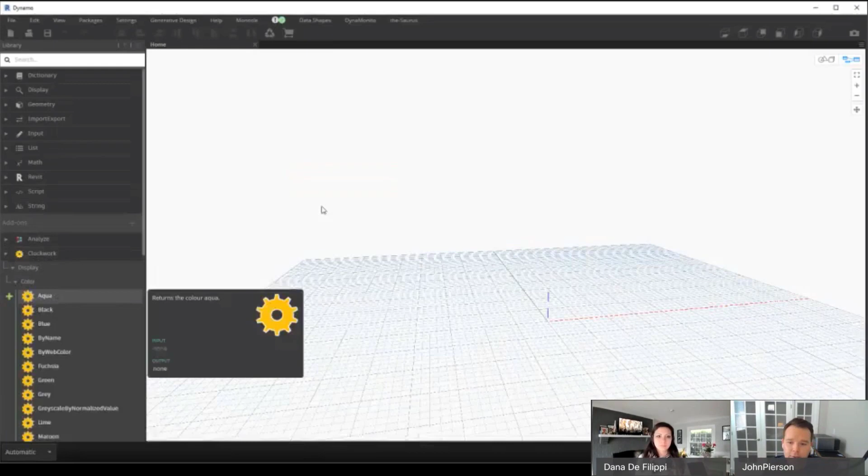My specific use case was, since I am a package creator and someone who works for a consultant, we send off Dynamo graphs with packages in it a lot. And until recently, there was no way of knowing - if I drop a clockwork node on the canvas and sent this to someone and it turned red or yellow - what package this came from. So that's how it started, was frustration with Dynamo. I have a lot of respect for the Dynamo team, all those people are awesome, they're friends of mine, we've hung out too, like we were talking about earlier. But there are things that kind of miss the mark.

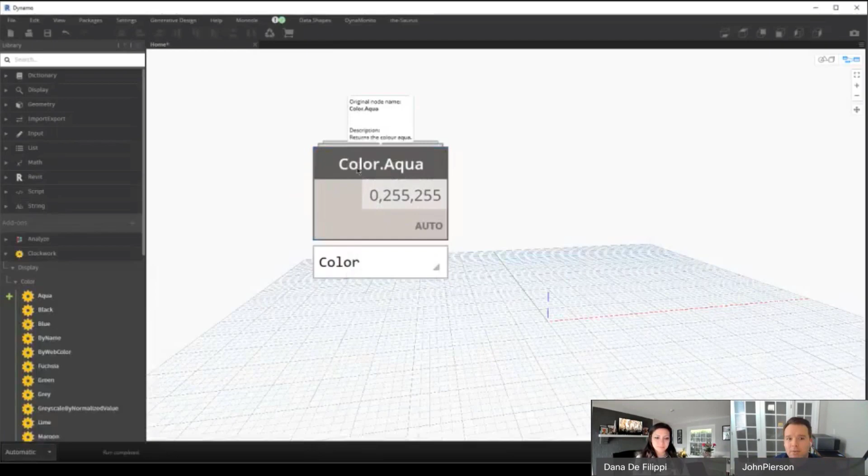So it started out with me trying to fix some of the stuff that was frustrating me. Whenever I started looking at custom package usage, we were working on things like how do we tell which package it's from, and we were playing around with just annotating the graphs. So I reached out to Racel on the Dynamo team and said, hey, how do we start making stuff that makes Dynamo read Dynamo, you know?

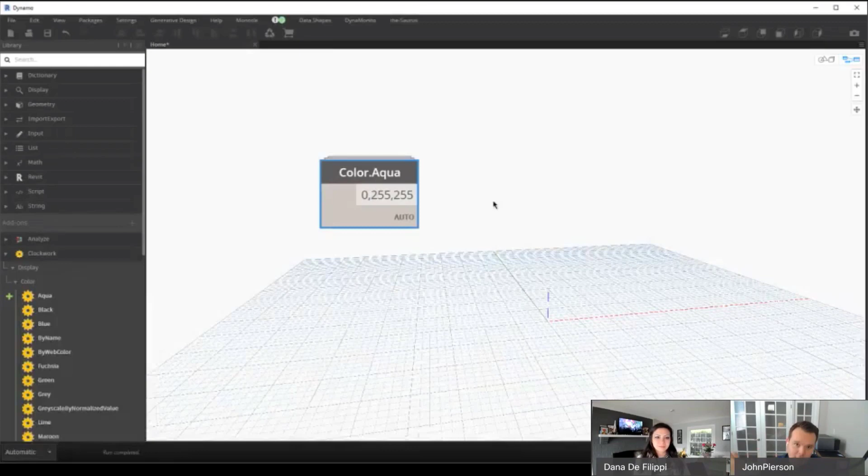And she said, oh, you should start looking at view extensions in Dynamo - they're really cool and this new thing. We're teaching a class in London on them at their user group. If you don't know, the Dynamo user group in London is a huge group, and they're all geniuses. So they did a whole workshop on view extensions there, and they recorded it, so I was able to tune in and see what the deal was. With that, it was one of these very complex things where we went from adding stuff to the sidebar of Dynamo, to adding stuff up in the ribbon.

So in regards to my own journey, that was a big step. I started out doing Python nodes, similar to what you're teaching on your channel, Dana, to building C sharp nodes, and then it had to jump to something that was like an add-on to Dynamo now. So it was a pretty crazy jump for me that was a little scary, if I'm being honest.

And why did you jump? Like why go from Python to C sharp? Yeah, so from Python to C sharp, one of my goals was to start building Revit add-ins as well, and C sharp just always seemed kind of interesting to me. So I started learning that, and Marcelo actually showed me some of the zero touch stuff as well.

I really like C Sharp because I'm lazy. Visual Studio does a lot of auto prediction for you, so it's pretty amazing when you're in there. You can get some of that in Python too if you set up your environment correctly, but you're typing and it's just predicting it. It's so nice, and then you compile it.

And nowadays I build Revit add-ins as well that we sell, and they're in C Sharp, compiled to plugins for Revit. So it's kind of part of the journey. I still like coding in Python all the time in Dynamo though, because it's so quick - you just drop a node and start hacking away at it and see what happens. But yeah, those kind of went from the Iron Python implementation in Dynamo to C Sharp with zero touch nodes within Dynamo, and then one of these frustrations led me to view extensions, which are in C Sharp as well.

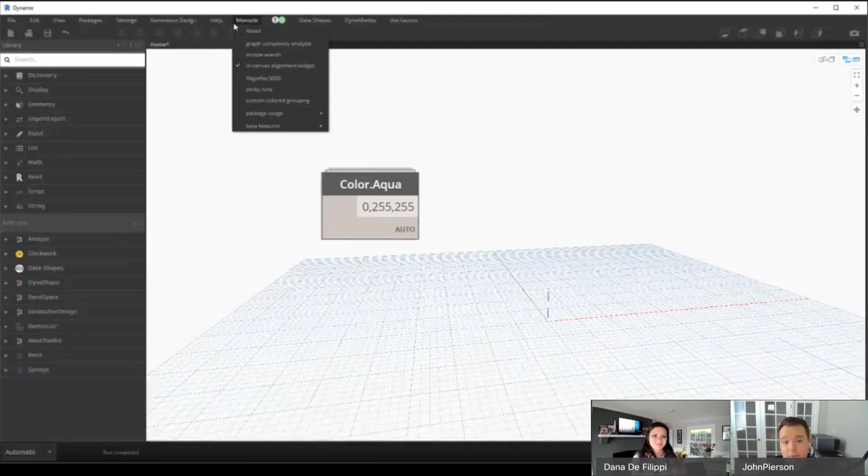So kind of interesting - view extensions are considered a little of a crazier thing to create. Back when I was working on the package stuff, it was very clear how difficult they were to make. So when I started working with it, I right away started screwing around with how things work.

So I met with the Dynamo team about package management, telling them some of my gripes - kind of like a little gripe session. I was like, we need to tell people where packages come from, what packages these nodes come from. And they were like, well, it's very hard to build, it'll never exist in Dynamo, or something along those lines.

So when I built it, I just went ahead and was really goofy with it, because what it's doing is really cool, but what it looks like is very silly and kind of dumb. It's kind of like my nod to them regarding how they said you couldn't manage your packages in that way. And I will say, I call it the package usage doggy.

Is it the doge? Carl Storms told me 'doge' once, and that stuck. So that's what I've always thought. Carl and I had a debate a few times on this, I think on one of our many chats. And yeah, I believe both of us say it differently. And Bill, of course, wanted to throw in a third, like the GIF debate. That kind of adds to the fun of the tool, right?

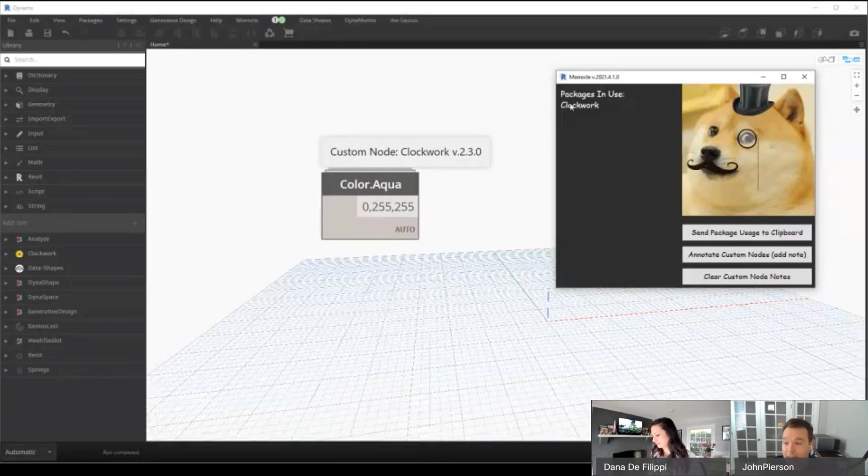Yeah, and when I was building it, I right away started screwing around with adding this little meme in it, Comic Sans and all that stuff. And at the end of the day, it was a really cool tool that does some crazy stuff, right? It does all these annotations for us, and if you move the node around it'll update, and it'll do it for a whole graph as well. So it was one of the first things I built just to make sending Dynamo graphs better, and it's just kind of funny that it is this kind of tool.

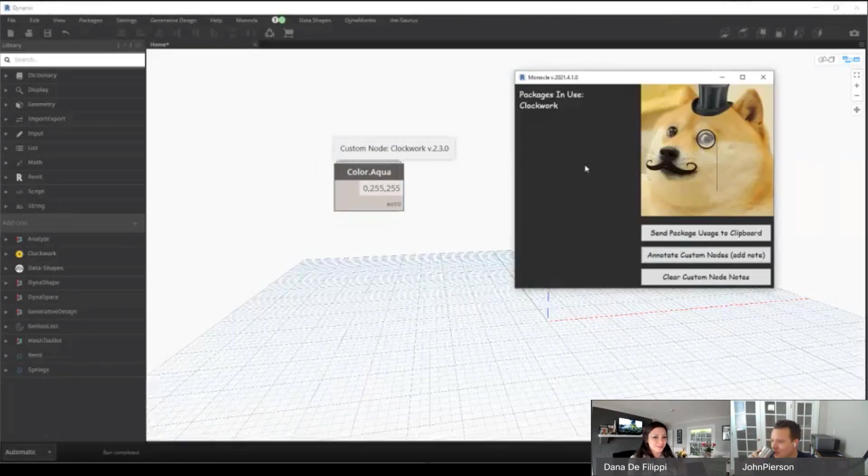And then even something else I added along the way of building this tool was that depending on the month it is, this guy will change what he is too. So keep an eye out for that too. That's a new looking doge there. For sure, and I think even if I do it again, it should probably be different.

Oh, that's so cool. Yeah, so if you do it around certain months, I won't say which ones, it'll actually be different too. So keep an eye out, just kind of fun with it. This is open source too, this specific portion of this tool. So yeah, it's kind of contributing back to anyone who wants to build cool tools, like I always say, right?

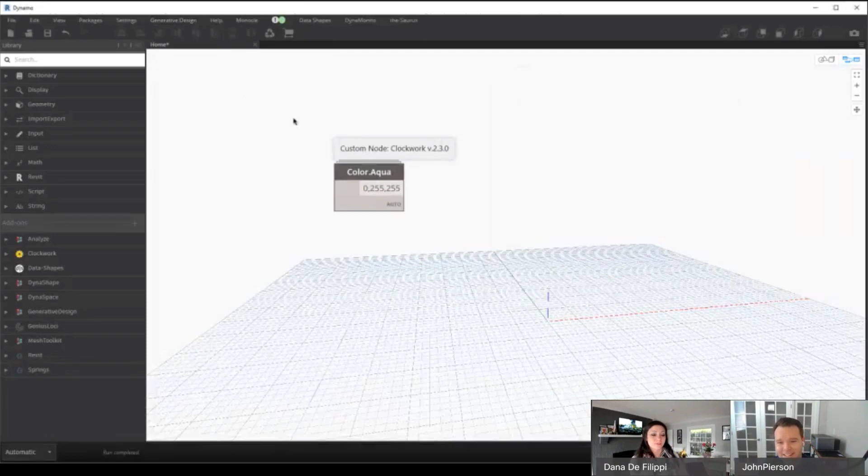It's definitely a tool I use very regularly, for sure, with every script that I have. And if you're not telling people what packages you're using in your Dynamo graph, you're not being very nice - not just to help other people out, but to yourself too.

Like, what if you get a new version of Dynamo and you want to open that graph in the new version? You have no idea. We've seen that a lot, where people install a fresh Revit install and it comes with Dynamo now, and all these add-ons are blank.

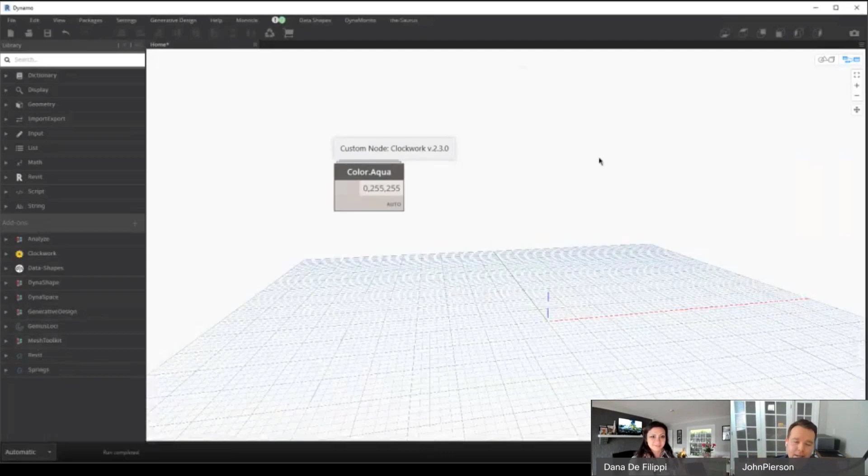They're like, man, I don't know where any of these came from. It's nice to annotate them in a way that stays with the file - this stays with the file forever until you delete it. So it's like these are notes in Dynamo. If you hit Control W, you can add a note, of course.

There's other advanced ways, like auto-downloading packages from the package manager and all this madness. At the end of the day, I just wanted the equivalent of a sticky note on the screen telling you, hey, this is where this came from. So that's kind of where that happened, and the whole Doge meme thing - it's fun. A lot of people laugh at it.

I think at AU 2019 in the Dynamo classes, I loved seeing this on every screen in the class for Carl's presentation, I think, and Jason Boehning's. It was kind of funny - you're at this professional conference and we see this guy on all the screens. It's kind of like, I made it. No, I'm just kidding. But yeah, it's really fun.

And for every person that has fun with it, there are people who have less fun. So we do have the boring mode too, a little more professional, so you don't have this dog on your screen when your boss walks by, back at the office, you know.

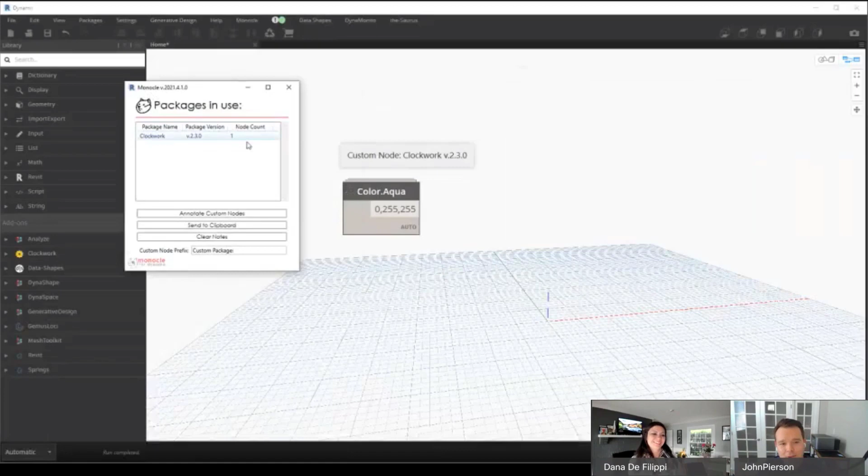This one has more features as well, like node counts - if you start adding nodes, it'll actually update those counts too. It also has a keyboard shortcut. Having stuff that's really interactive for users, I want the user experience to be great. If you hit Control Shift P, it'll actually do it too.

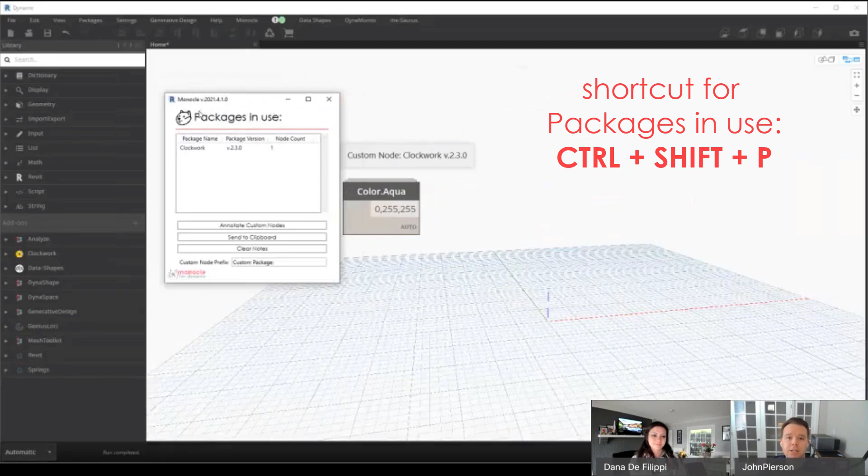A lot of the tools I add to Monocle are partially because people have these ideas, but it's also just experimentation for other tools I'm building. Keyboard shortcuts are something people are super familiar with in our industry, so adding them to tools is pretty fun too. But yeah, this one's the boring mode if you really didn't want to see the big picture of the Doge.

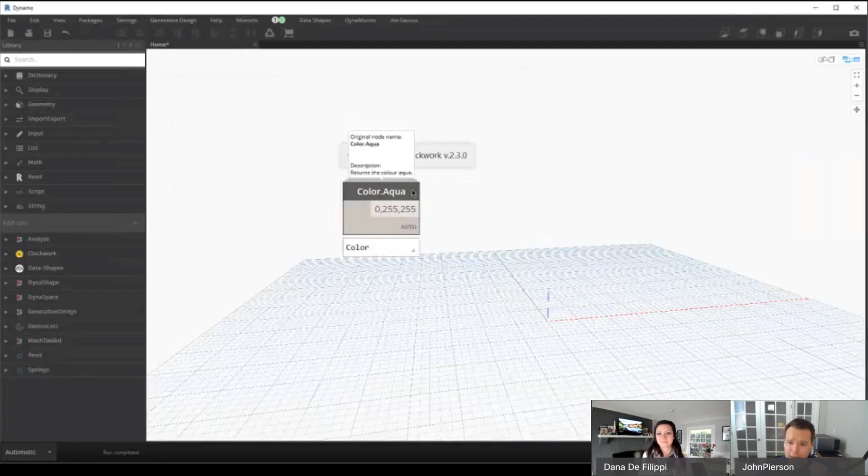Other than that, that's kind of where it started - that was back like three, four years ago when I added that, and then it just kind of took off from there. Monocle has a bunch of menu items in here.

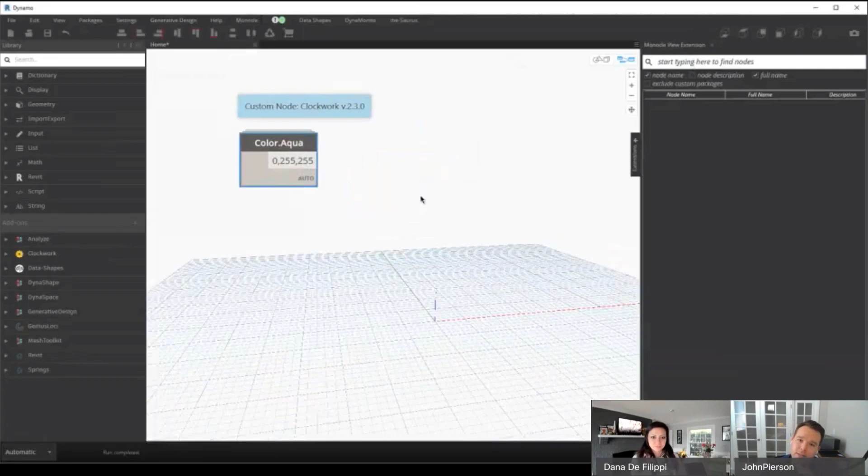One of the ones we were talking about before we started recording was the search, or we did it right at the beginning - the Dynamo search. I've spent a lot of time deconstructing it just because I'm so frustrated with it. I know that if you start typing, it's loading all these icons for you, and it's also only loading like 50 results no matter what letter you type, so they can try to make it faster.

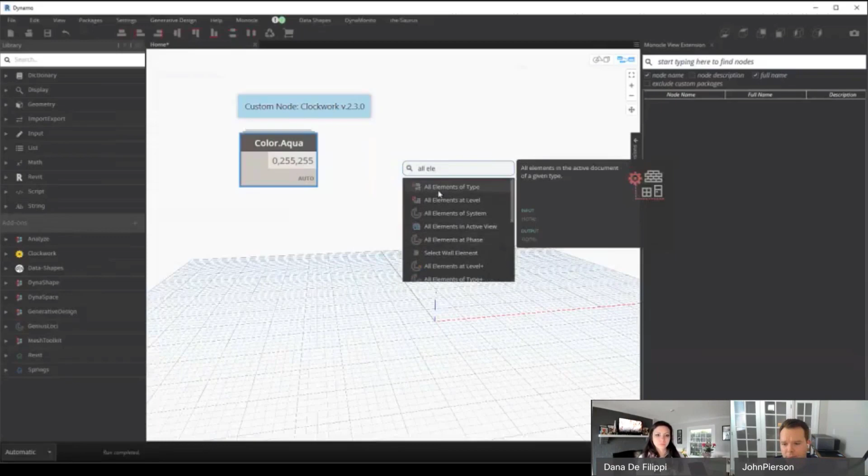And I know all this because it's open source. I've had people go, 'how do you know that?' You can look at the Dynamo source code. They're also searching everything about a node - so if we just place a node, when Dynamo searches, it's searching the node name, the node description, the node category, and I think all the inputs and outputs at the same time.

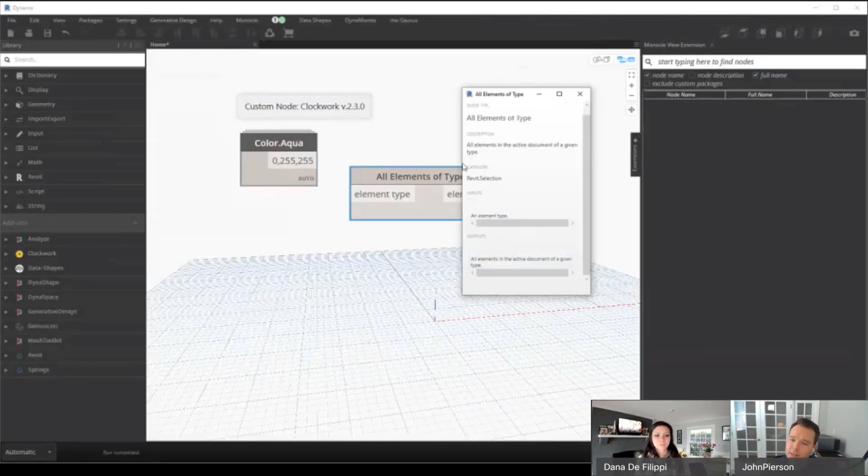So the reason you get so many weird results is because they're eating the whole pizza at once - they're not picking how many slices they want first. So when I saw that in the repo for Dynamo, I was like, oh, we need to give users a choice there of what they're searching. Because we just search everything, we're going to get results that just kind of tick people off.

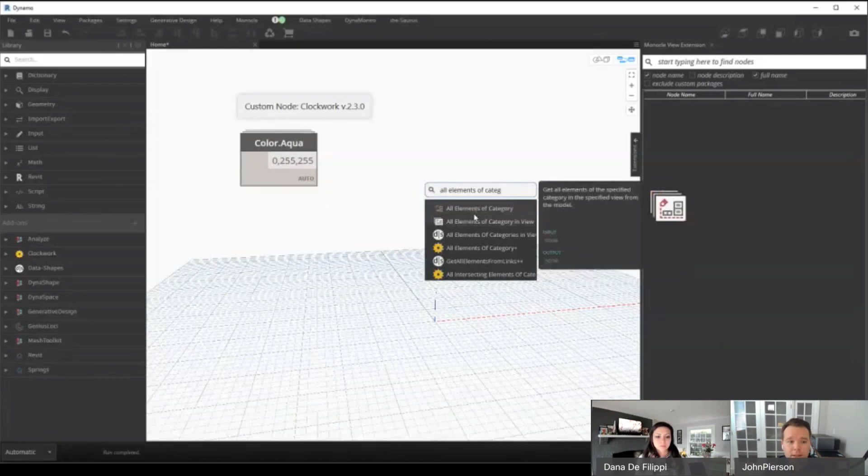I may be someone who's been using Dynamo for a few years, but I definitely empathize with our users who are new, who you tell them search for this node, and they start searching, and they right away think they did something wrong because they can't find it. That's a really crappy place to be whenever you're trying to learn something, to feel bad that someone else next to you got it and you didn't. So I like to have fun with these tools, but at the same time, I like to try to relate it back to where I started with these tools.

It also makes it super hard to teach, right? Something that should be a non-issue, you shouldn't have to teach somebody how to search a library. You now have to take 3 steps to search, right? Exactly.

And if you're in a lab setting and someone has a different version of Dynamo, the search might work differently. We're all used to searching. Our whole life is searching for data these days, and we're all pretty good at searching. And then you get in something like this, and it's just showing you results that are not great. So that's kind of where this came from for sure.

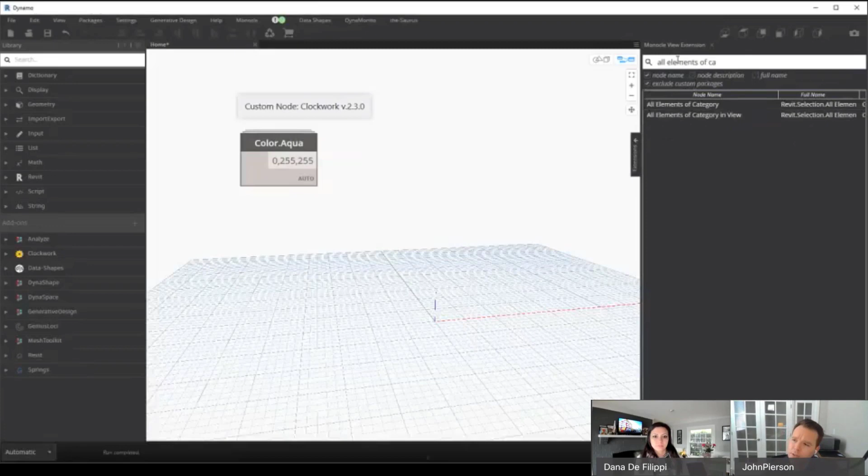And then we have the option in here to search by the node name, the full name of the node, which includes the package name a lot of the time. We can exclude custom packages, or we can include the description if we really want. So this is kind of how our search works. In newer versions of Dynamo, you can undock this. I'm in Revit 21, so you can't. But once you click on it, that same interaction happens where it'll place a node for you. I think if you hit enter, it will too.

Is there a way to get, I guess not, because it's a separate extension, but to get the information at least in terms of where that lives in the library? Yeah, so that is not in our tool, like this little tree view. That one's not in this tool specifically. Which maybe isn't even necessary.

The whole reason I teach that is because things are impossible to find. And so being able to find where groupings live together, you end up learning 30 new nodes because you would have never been able to search for it, just going to the library. But maybe this way you don't even need to be in the tree because things just come up when you search for them.

Yeah, it's interesting. I like the tree view and breaking it down because it gives you logic. So like Revit, selection, here's how to collect things. In this tool, I want it to be really fast. So that's why it doesn't have icons. It doesn't have anything that makes it look any different because we're just wanting to search like this. That being said, we probably could add some of that or implement our search stuff into the default. Or have an option for the column, maybe, to just tell you the root of where that thing lives in the library. Yeah, very true.

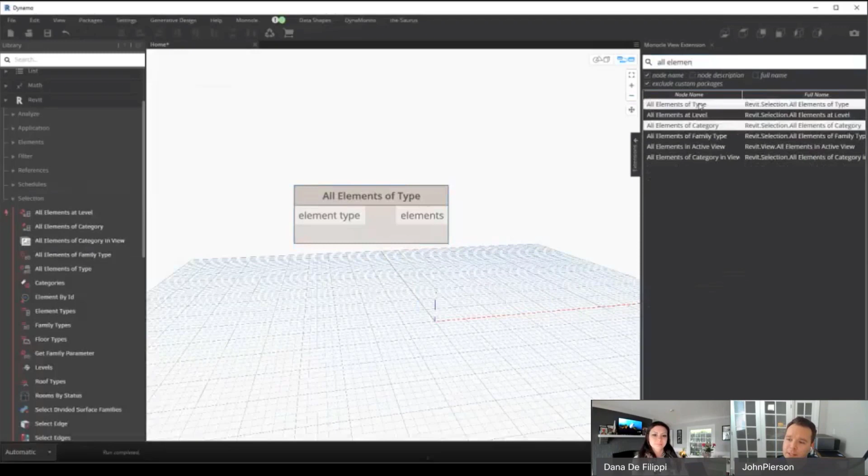Other great things. I built this a little while back, just being frustrated with search, and one of the users of the tool said, I'm frustrated, I have to click in it. So that added, you can do Control F to go to the search as well. When you do that, it'll place the node. You can do whatever you want. And I hit enter, so I did the first one. But Control F will go into that find mode and clear the selection for you. So if you have a big selection or a big text, it'll clear it too.

Yeah, so that's kind of where that came from too. This is one of the ones we see used the most, I think. So much that even in the Monocle menu, you can go to a beta feature and just replace the default search with ours. So that's kind of in there too.

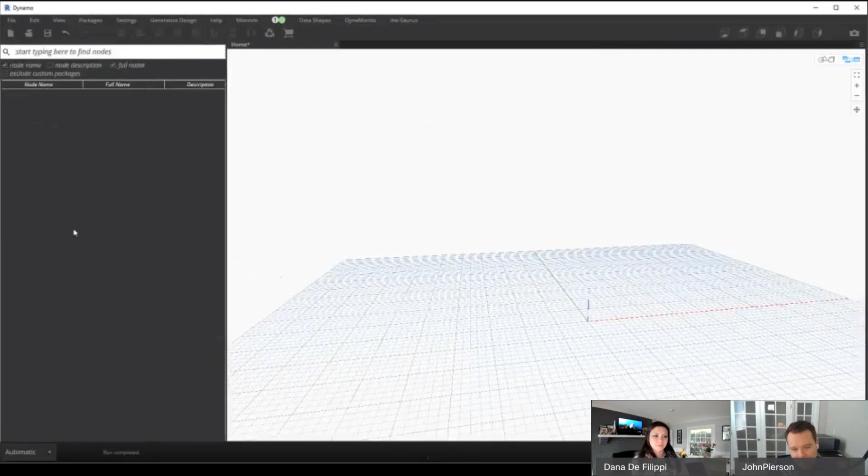Wow, that's very cool. I don't use this one as much because I do like to see the menu with the tree, the collapsible tree. So admittedly, I don't use it this way a whole lot, but I know a lot of people do. So it's kind of one of those funny ones.

And that probably could be written into the XML if you wanted all users to see it that way, right? Yeah, I think you could. So you could probably have all your new Dynamo users, when they go in there, not fumbling through this search or having to pull up the Monocle search. It automatically defaults to the Monocle search. So that's a decent idea, actually.

For sure. The other scary part with building tools, and people will know this as they start to build graphs, is the more stuff you build, the more you're like, man, I hope it keeps working. You know what I mean? 100%. Especially when a new version of Dynamo drops and you're like, oh God, it's gonna break. Exactly. Or a new Revit version. Yep. Or a new category of elements.

Oh gosh, yes. That's something we deal with a lot because I'm a BIM consultant, where we'll send graphs and they'll stop working between versions, and it's like, oh my gosh. Categories is a great one. So we'll use a default search for this. Categories is great because we love this node, right? You've shown this node on your videos as well, because collecting elements... well, I am guilty of using the right click search a lot, so there is that.

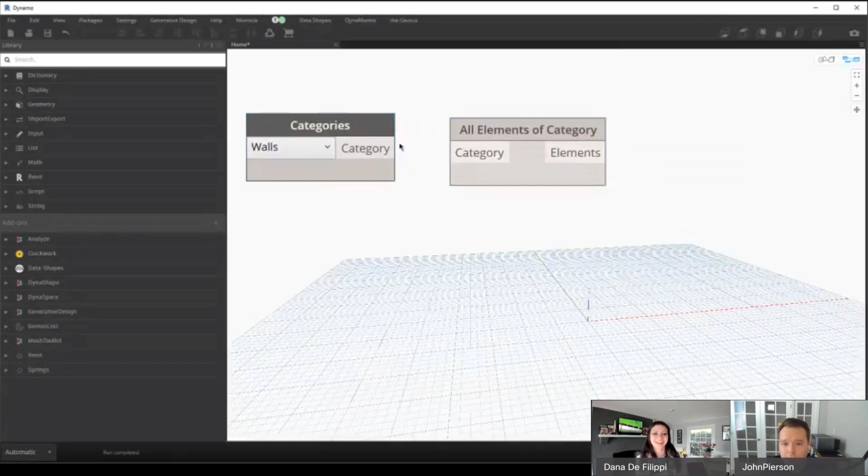I do too. And I think once you get to know those things, they just become muscle memory, right? Like Element.GetParameter, I know to type that. Yeah, once you start to learn it, it's like second nature. So that's another thing to keep in mind when you're training people, too: it's easy for you to say element get parameter value by name, and it's like, no, it's Element dot Get, and no spaces in that one. And Element, not Elements. Yeah, exactly. So it's one of those things you get so used to.

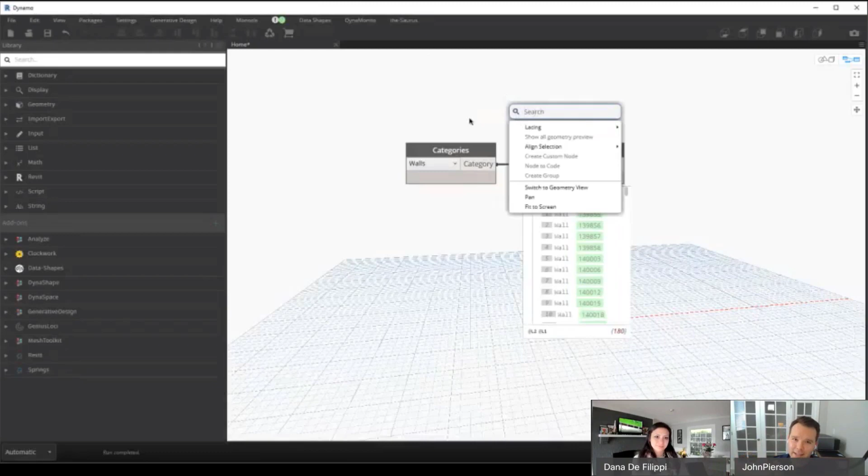Yep. And even for the right click search, there was a little bit where Monocle would override that one too, but we got to a point where they were clashing, where you'd start typing in the Monocle search and then the out of the box search would pop forward. It got crazy. So I was like, okay, we can't mess with the right click search. That's theirs. Or shift double click, I think still does it, or is it no?

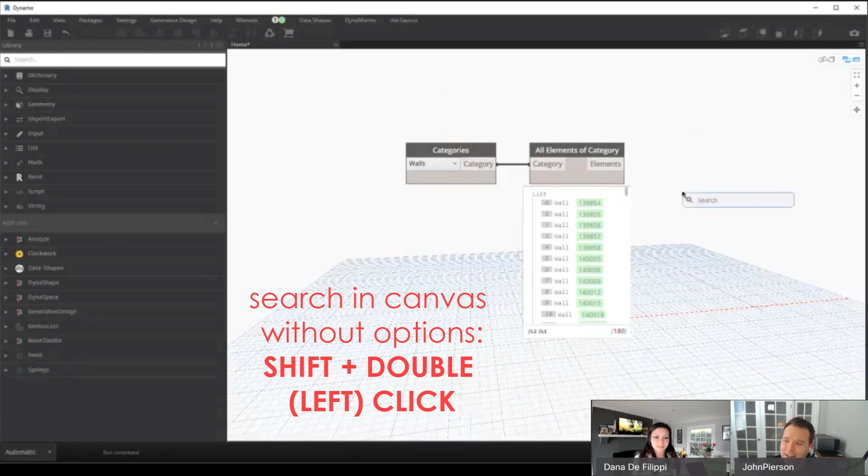Yeah, shift double click still does search too, without the new little search menu. Oh, that's a search for me. Yeah, if you don't want to see all this, you can shift double click. Oh, interesting. Okay, even that one's acting a little odd. Yeah, so that one's another type of search as well.

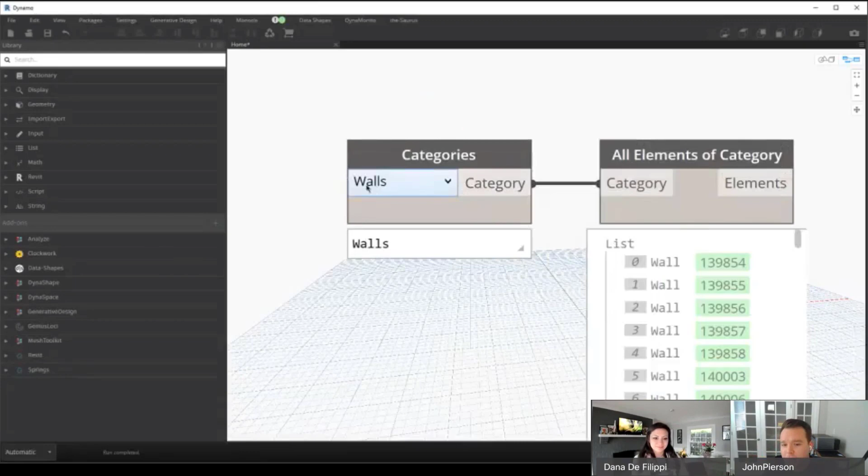But thinking on that, the categories node is one we use all the time, but between Revit versions or Revit files, depending on how many categories are in the model, up until I think recent Dynamo, this can change. So if I have wall selected in Revit 19 and then I load this in Revit 21 and I had two more categories above it, I'd probably be on common edges, whatever the heck, you know.

That's another one where all along we were like, okay, we're going to stop doing that and we're going to do, if I could type, Category.ByName, do walls. Gotta do it inside of quotes. So as someone shipping off a graph to someone, this is the best way to do that.

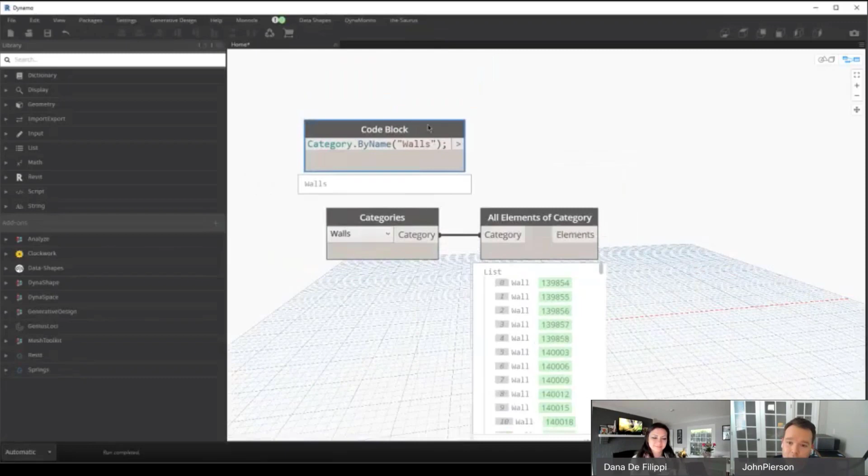But that led to another frustration with Dynamo for us at Parallax specifically. I don't like typing this all the time. And other nodes have that node to code option whenever you right click. But you'll notice none of these do. So that was one thing where it's like, man, node to code's great, but we can't do that with this.

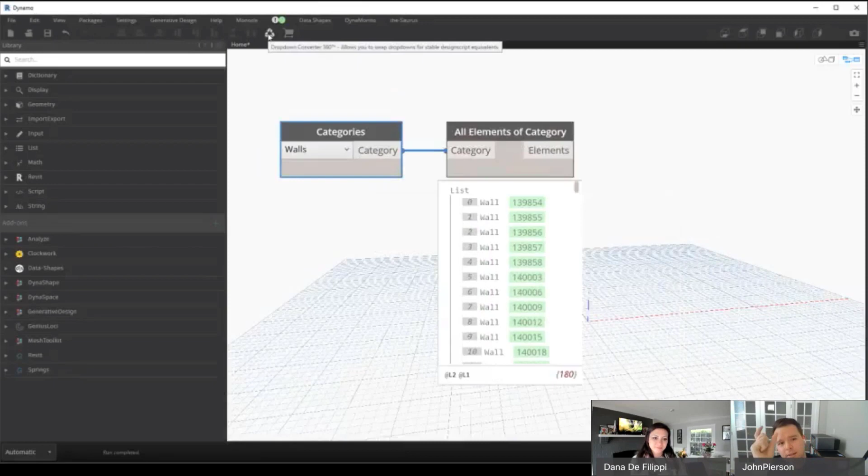So in Monocle, we actually kind of have our own little way of doing that as well. Inside of the toolbar, we've added shortcut icons for some of these quick things that just make life easier. So instead of me wasting my time typing all this, we can now convert those. That's amazing.

Even when you get it from somebody else, when I'm cleaning up a script and doing the custom package and all of these things, that would be an amazing thing to do. Yeah, add it to your cleanup checklist. Yeah, we could start to have it where you have these cleanup things for sure.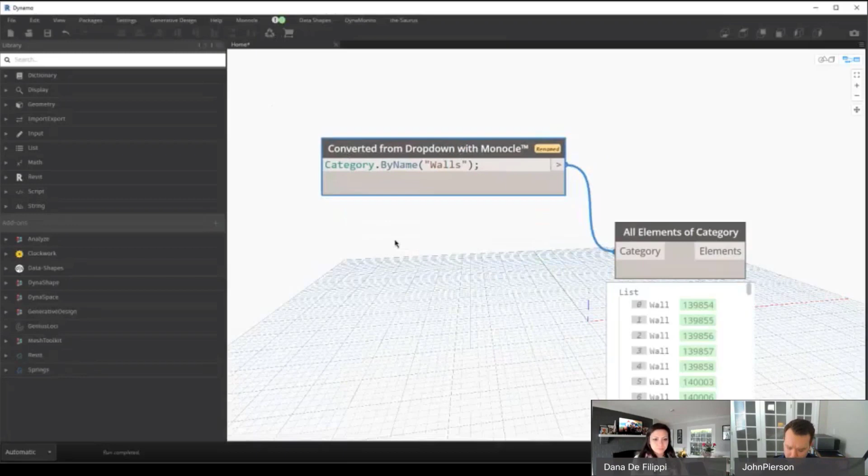Like sending a graph with this, I know I want it to be walls when I run this graph. That's what you're getting. If you want it to be a drop down someone can change, just leave it a drop down, of course, and make it an input. But in our case, we're using that node a lot. And it also works for element types. So that one's a little weirder.

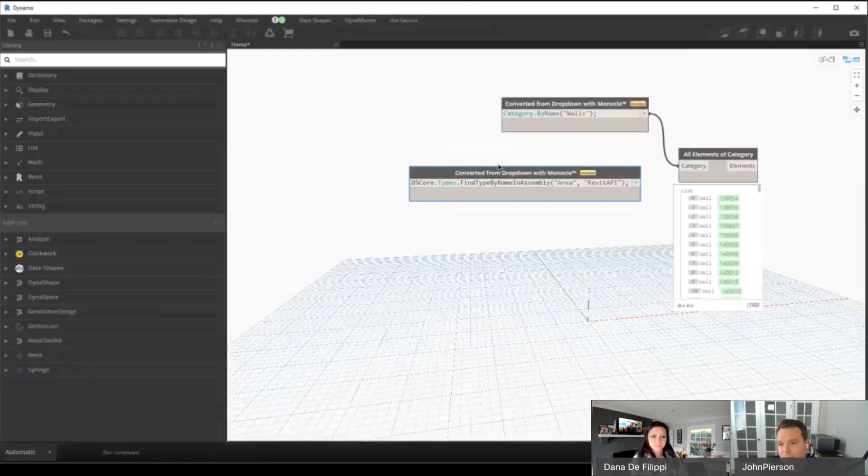So if we were to do, let's do area. This is a node that we use quite a bit too for setting element types like wall types and things like that. Once again, node to code option. But if we do that, it'll actually do the full one. This one's a little bit harder to remember than category by name. Definitely. And what this does is it actually finds it inside the Revit API for you, and now it's hard coded.

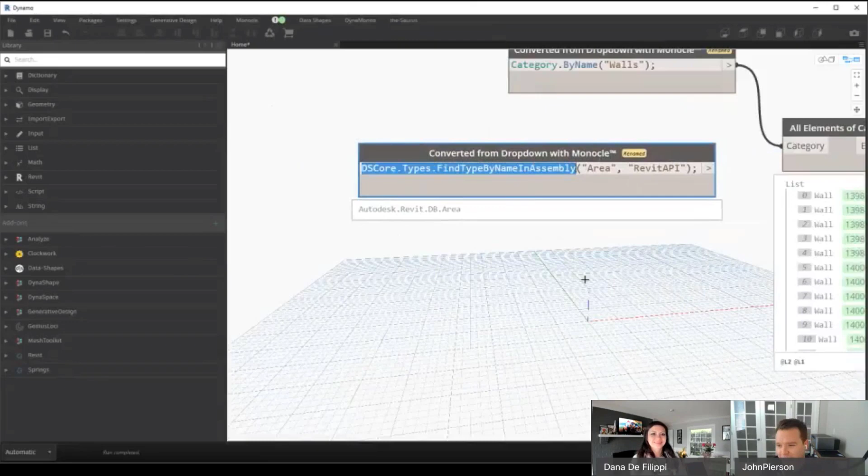So this is one that we use quite a bit, and I had to look this up every time. Every time I had to do this, I was like, I have to look this up and figure out what to do. And someone on the Dynamo forum actually revealed that this is how you do this, and I was like, holy smokes, we're adding this to the tool. So that's one that we now convert as well.

Just out of frustration of that change between Revit and Dynamo versions of not keeping the category. That broke a lot of graphs for us and ticked us off quite a bit. So another one of those little things.

Yeah, I think all my sheet scripts became shaft scripts in that new version of Revit. Oh, for sure. And they still work perfectly, right? Yeah, of course. I have the exact same parameters.

Yeah, for sure. So we're building stuff to kind of share and hand out. This helps with that kind of stuff, and we're always adding features like this to it when people are frustrated. Another one that really bugs me is, let's copy this and do doors. We'll have a lot of graphs even at Parallax where we have to collect a lot of categories, right? So we'll collect these two.

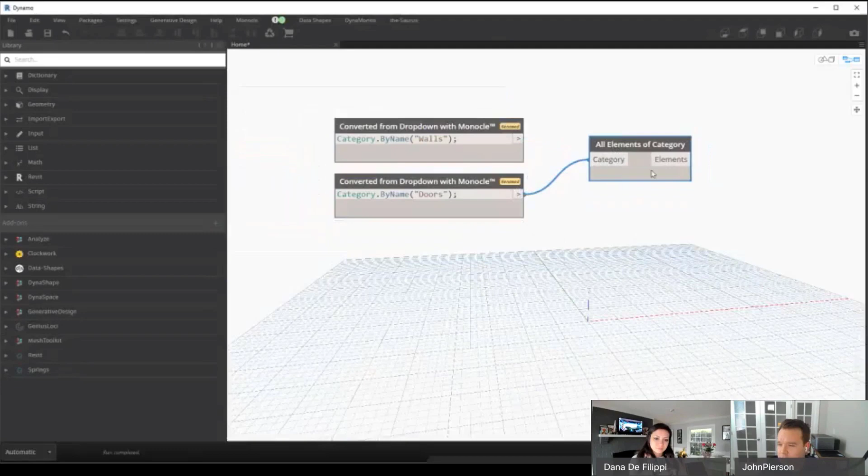And if you're a Grasshopper user, you know that you can just hold down control, I think, and connect multiple, right? And in Dynamo we can't. So a lot of the tools, I kind of get inspired by other tools. Grasshopper's one. I'm not a pro Grasshopper user or advanced at it or anything like that. But I admire how their UI is, and I really like the work they do. So a lot of that stuff will influence some of the tools I add as well.

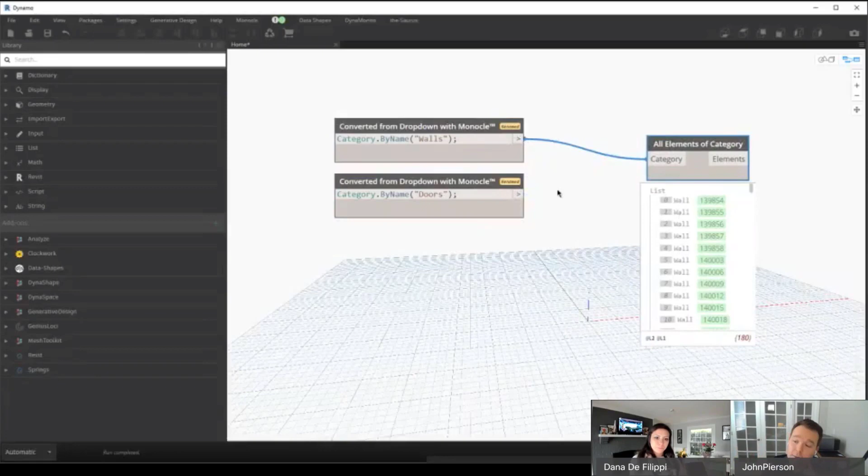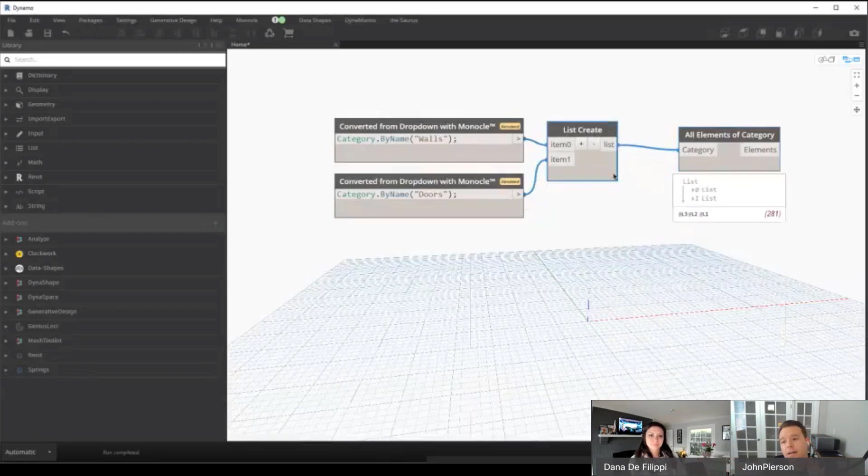And this user interaction of having to search for it, it used to be list.create, by the way, and now it has a space. Having to do this and then connect those is super annoying. And it also stacks the list down, so you have to flatten it and all that. That interaction sucks when you have like 20 categories that you're targeting for a workflow. We have workflows at Parallax where we're deleting subcategories from models and things like that. And having a node that's this long that I have to go through and connect just drives me crazy.

So another one of the tools that was born out of frustration recently was this little shopping cart, and it'll actually combine them all for you into a List.Create. Wow. And then you can use that from there. So that was one that came up recently, where it's like, man, how do we do this where we control these, you know?

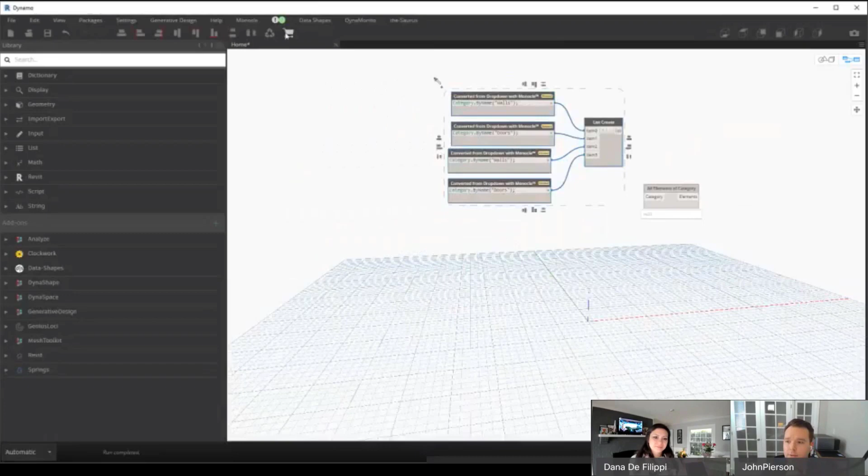And it does them in order. So if we were to have these stacked this way, it'll actually still go in order. And you can really go crazy with this where you just keep on adding create nodes too. So that one's kind of fun too. It's one of those things that other tools do, so we kind of wanted it right within Dynamo.

Yeah, a lot of other things that I kind of just glaze over are these little in-canvas tools. I'm kind of OCD when it comes to aligning all of these, so like... It's wonderful seeing you use your own tools. And I will say yeah, I am incredibly OCD about my scripts as well. So that's for sure a huge time saver.

Yep. So always having to align like this, where, let's pretend that doesn't exist right now. Align. Oh, I missed it. Top. That'll drive you crazy and you won't do it. If it's not easy to do, no one's going to do it. So we got to make it easy to clean these things up for people.

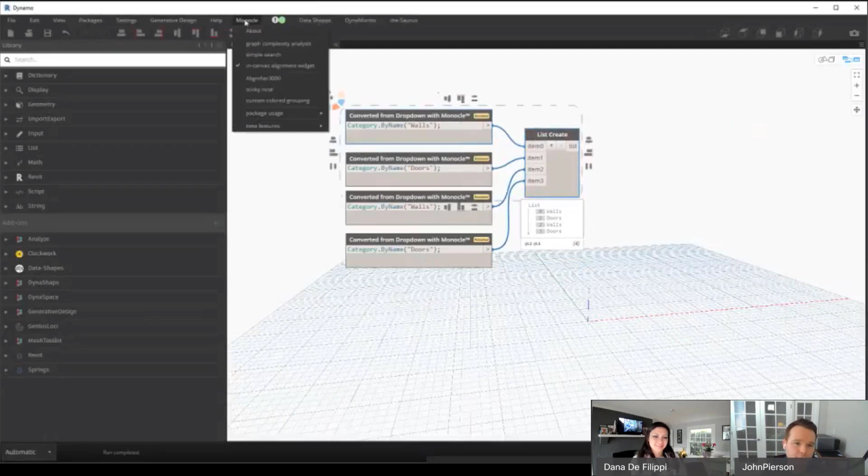So having it right in canvas, that is something that Grasshopper already does. Their tool's called Mr. Sparkle. That's a Simpsons reference, and it makes your graph sparkly, right? In our tool, it's called, what the heck is this called? In-canvas alignment widget, something boring. Yeah. So in canvas, you can turn it off if you really want, but I've never turned it off. And it has all those different alignment options.

The other thing our tool, Monocle, does, I'll actually copy these, is aligning groups. Like I'll group these nodes too, and going to alignment and I'll go to top. It doesn't do what you think it does. It does something way worse. It aligns everything inside the group. Oh no, that's not great. That's dreadful. And like, ask me how I know that happens, right? Yeah, it definitely got me a few times. So I think we get an undo.

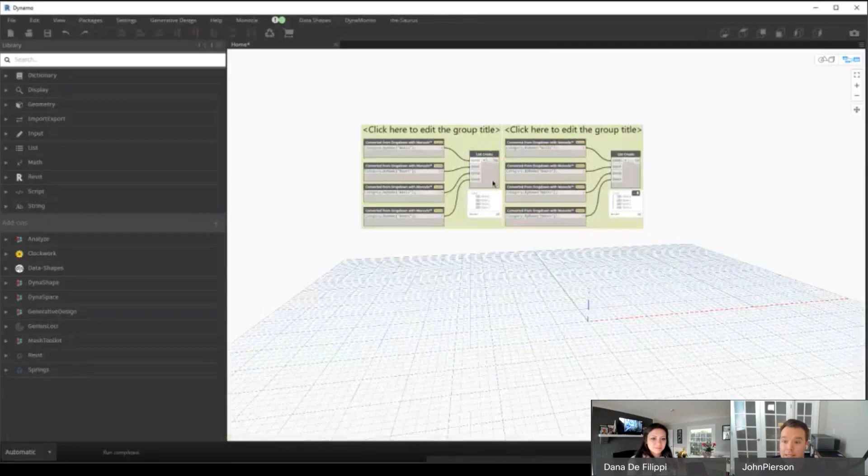Yeah. So one thing Monocle does is, I'll have to end up doing it in the ribbon, but it will align groups as well. So trying to get those groups perfect, instead of zooming in, you can just align them. And it won't mess up the insides of your group, which is nice. So yeah, that's another tool. They're in the ribbon too for things like groups, or if you don't want the in-canvas one.

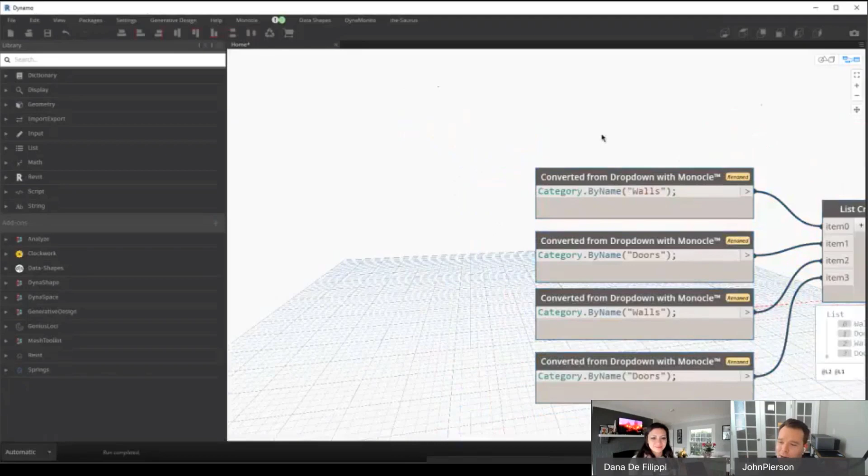Additional things that little in-canvas alignment does is the color coding. So this UI, I gotta give a shout out to my wife Vanessa. She helped me make this UI because I wanted it to be clean and not crazy and not a meme, you know. So she helped me out with this little eyedropper tool and figuring this out. We worked on that one after hours one day, to figure out what we want the UI to look like. So that's kind of fun.

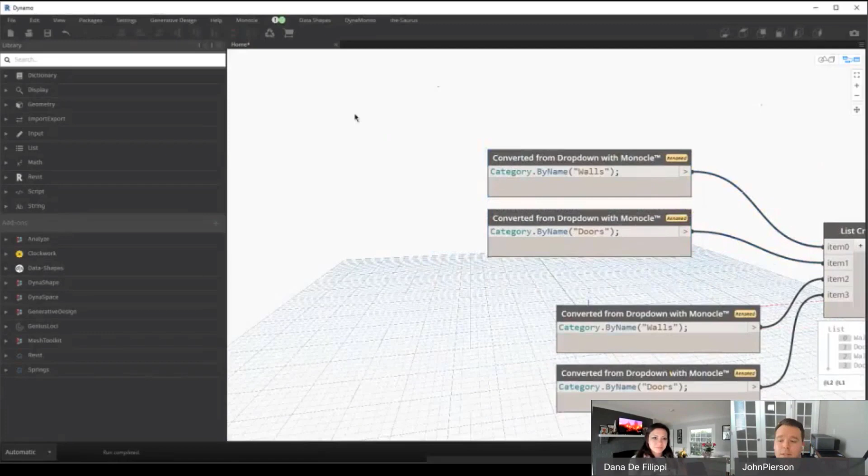So yeah, you hover and then you can actually start to color code as well. Those aren't hard coded. Another thing I've learned over time building tools for people is give people options to customize. So those colors are actually controlled in this window. So if I were to change any of these and then I highlight, it'll actually be driven from that UI. So this UI is your master area to edit these. And then if I make that a different text, it'll actually take that on as well.

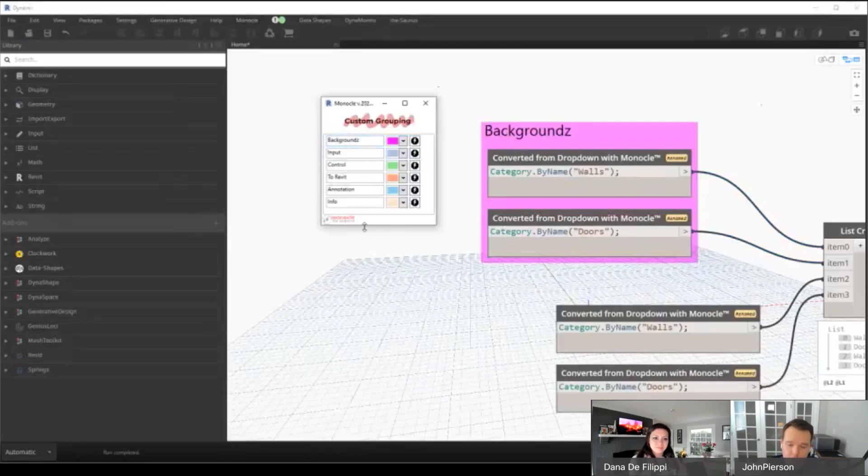I think I might have to close it though. So if we do, yeah. So that's how you drive that custom color grouping. If you really like nerding out on editing XML, there's XML settings in Monocle's extra folder to add more. So that's an option too for you. So always giving people choice is nice.

And then another funny thing is you can actually assign no color, just transparency, to groupings in Dynamo, which is kind of cool. So this has no color at all and it's grouped. So that's kind of fun. It's just a hex color that you can use. I find those are crazy nice too, I guess.

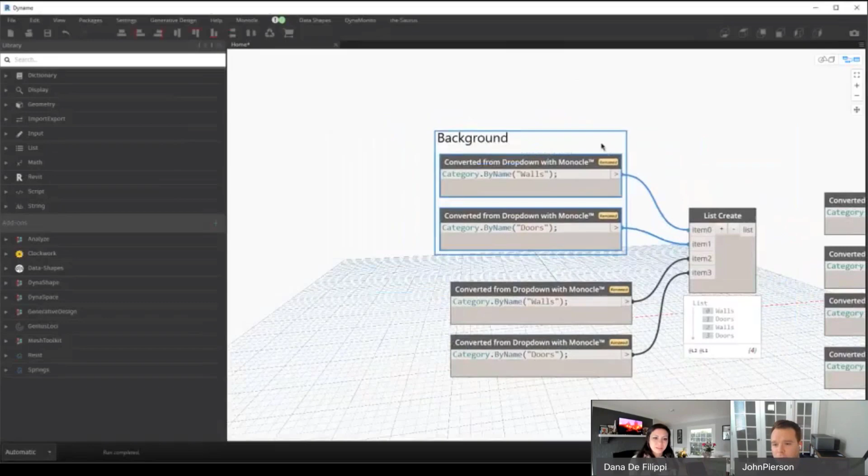Like groups in groups, yes, definitely do not get crazy with the groups in groups. But when you have something that's kind of a greater picture, sometimes it is nice when you have more complex scripts that have groups within groups. And so the transparent is really nice for that.

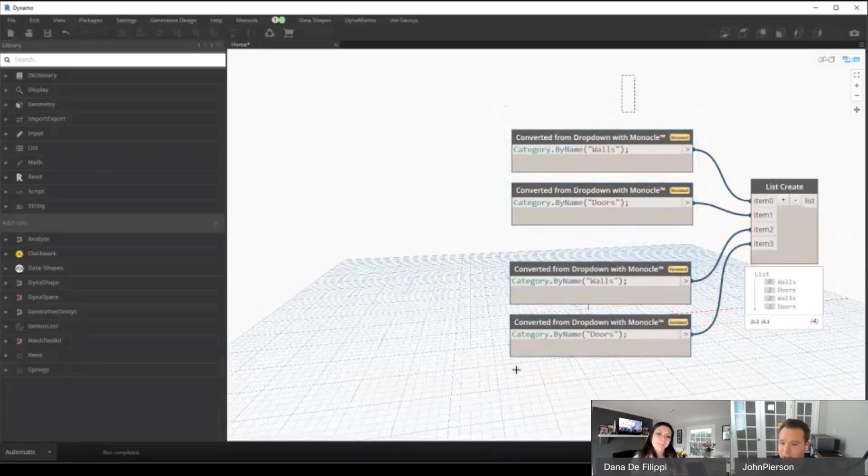For sure. And that's another good point: groups in groups aren't doable with the out-of-the-box grouping. You could do it if you edit the file, but if I select all these and hit Control G, it won't group them. But Monocle actually will let you do an overall group and then subgroups. So it's kind of a weird realm to get into.

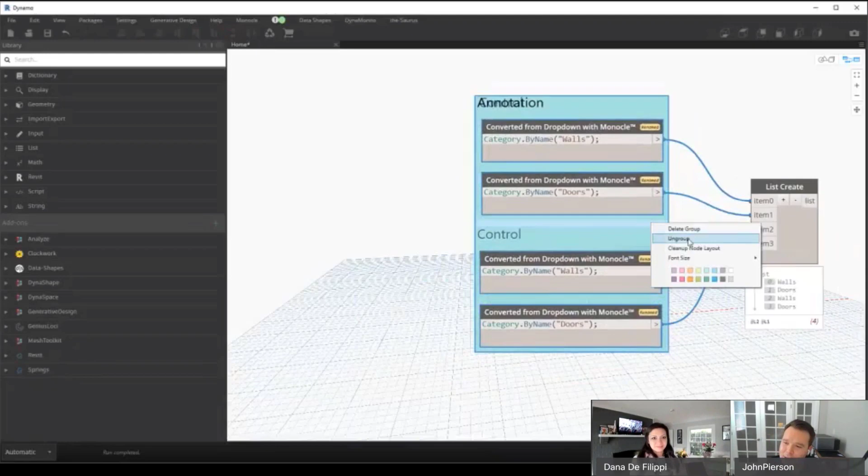I'm not advocating for people to do that. If you do it, it's at your own risk, but you can. Definitely. And sparingly if you do it. Exactly. I've done it before. Have a good reason for sure. Exactly. And it shouldn't break anything major. The worst thing that might happen is you can't get to something behind something. But just be a little careful with what you're doing with those. So it's kind of interesting.

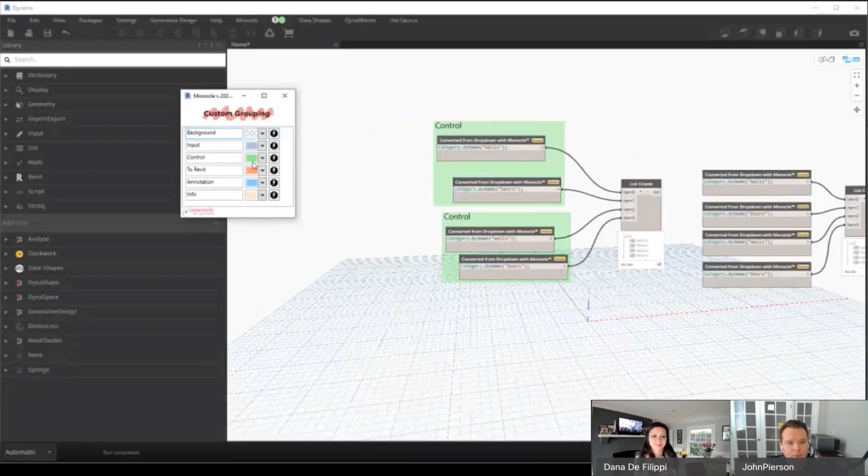I'm gonna get off on tangents now. You can actually hit the Windows key and then semicolon. I think you could put emojis in these things. You have to do it over here. I don't think it'll let me because of the WebEx, but you can actually assign emojis inside that form too if you wanted your group to not be text. That's really cool. So that's an option too. And then in the settings file, right? You can, yeah. Like the Doge.

Exactly. That's another thing: if you're having fun, you're probably going to enjoy spending time building these things. In a nutshell, we're annotating graphs and aligning stuff. That's not that exciting to some people. But when you're having fun with it and making tools that are very dynamic and working with each other, it's pretty fun stuff. And then it influences a lot of your other tools or graphs or whatever you're building as well.

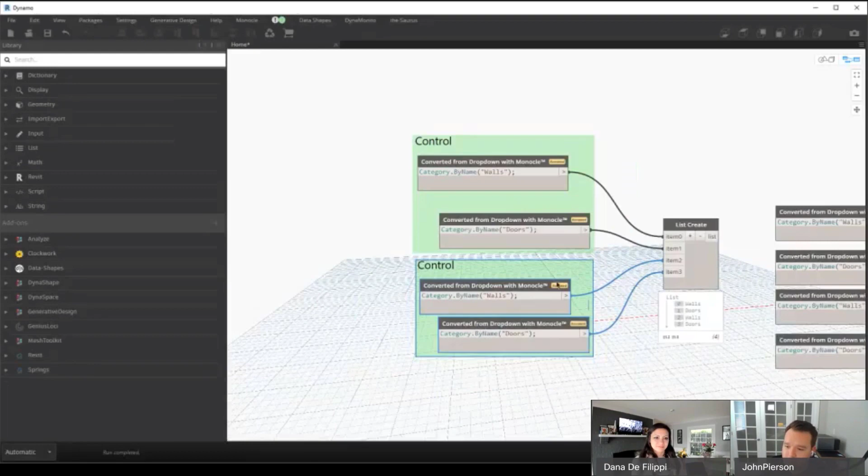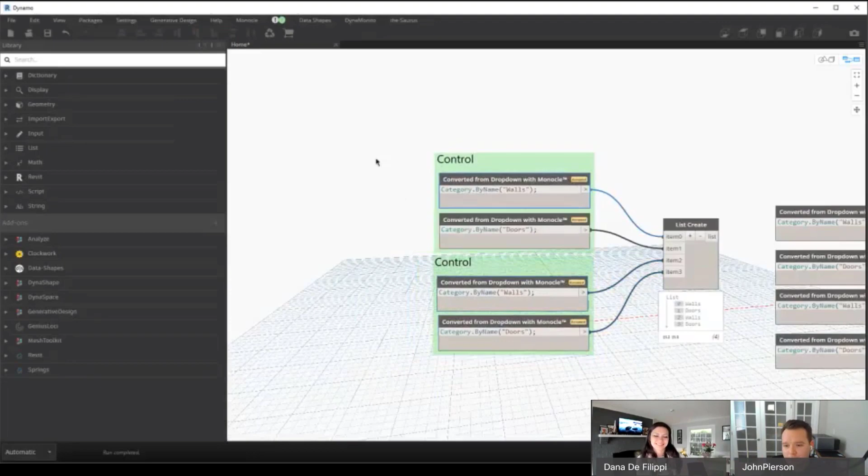So another one, just always have fun with it. And if you embed stuff in here that's really Easter eggy, when someone discovers it, you're like, man, you really are checking out the tool. So I appreciate it. We used to do that a lot with Dynamo graphs when I was at an architecture firm, like embed GIFs in the little UI windows from Data-Shapes and things like that.

Have you used all these tools in Monocle? Not all of them. And actually, I have to shout out to Alex at KPF. He showed me a lot of the grouping tools, especially the customizations of the color groupings. Awesome. That's major. Yeah, and he's the one who actually asked for that. I think that was a user request from him and like four other people. He was like, "Can we please customize the color groupings?" And for a long time, I was like, "No, I like the colors I picked." And then I was like, "Okay, we'll give it to you."

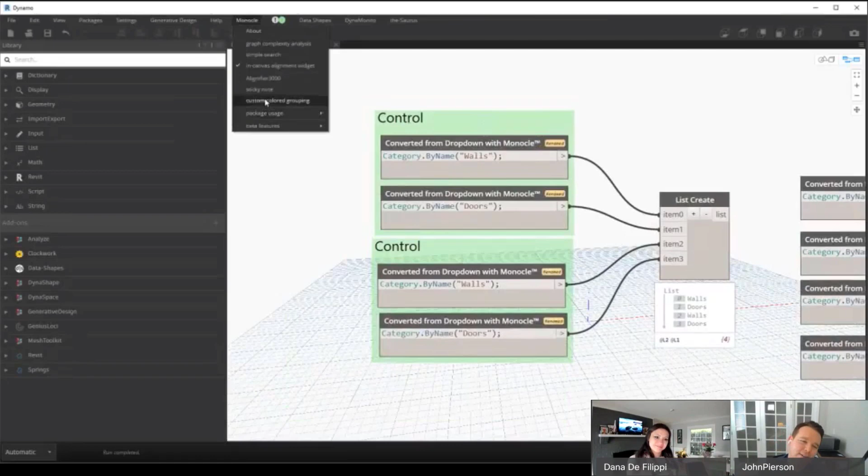Well, like you're saying, there's a whole bunch of different company standards, right? I'm not going to force you, if you're at SmithGroup, to use my color groupings. If you're creating Dynamo scripts, I am happy. But if you did comply with my color groupings, it might make me a little happier. Exactly, for sure.

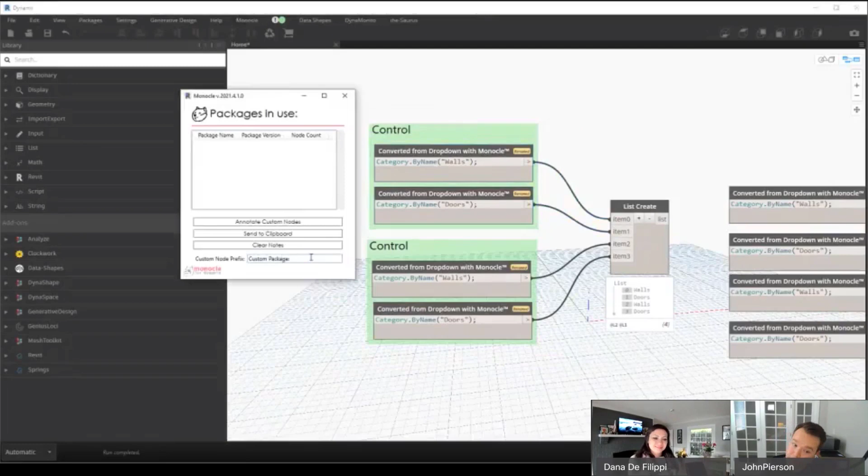And that's another thing. For even the package usage, if you don't want it to say custom package in the front, you can change that. Another consideration is different languages, right? We might like that it says background and everything, but if someone wants to change that, they can. So it's nice to give people those options, where it'll scale in a different way too.

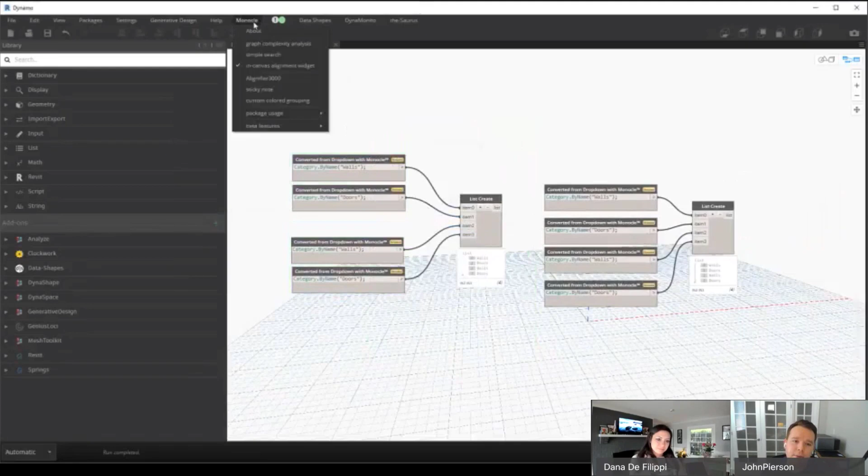Other than that, there are some old tools within Monocle that have just been left in there. There's that full align window. This is how align started out, as a window of its own. I can't grab that toolbar because it's too small. So it started out in a little window that floated. That's how all the tools in Monocle started out. That's generally how view extensions work. But having this open all the time just bugged me, since I always had to come over here.

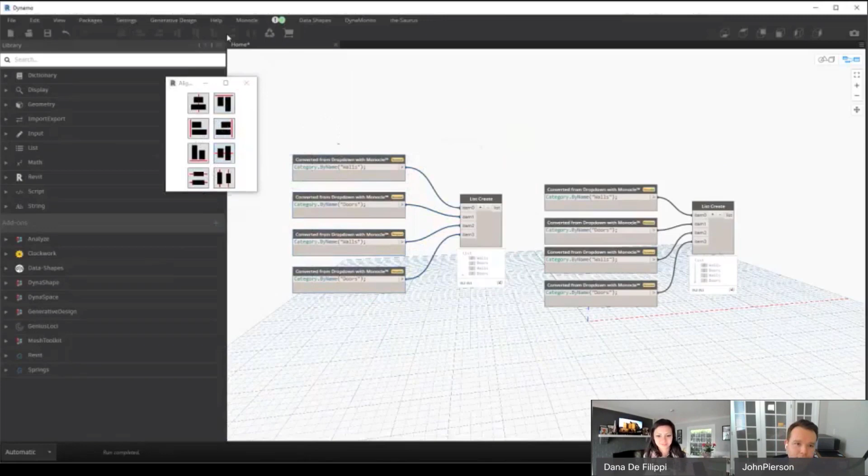So I even got frustrated with my own tool and I was like, there has to be a better way. So that's when they were added to the ribbon. And then that's when I was in Grasshopper one day and I saw their alignment tools and I was like, oh, we should make something similar in Dynamo.

So even frustrated with my own tools as well. Well, just know different ways that you can improve them, right? For sure. Yeah, so it's one of those things, just helping people make better Dynamo graphs, right?

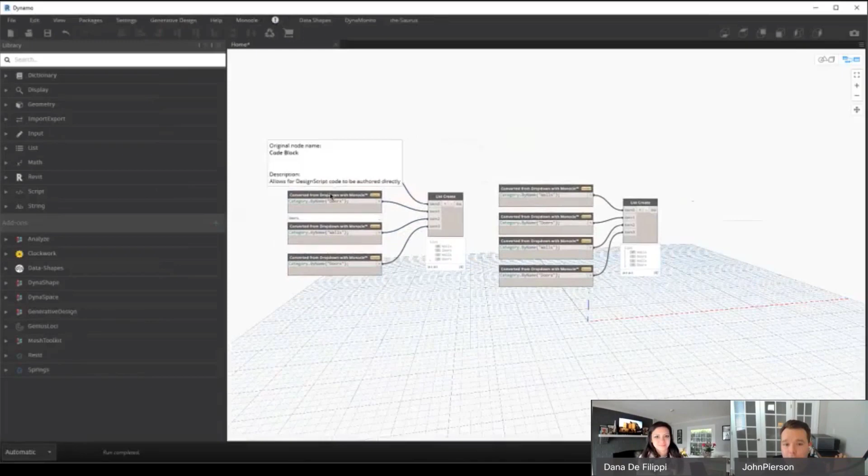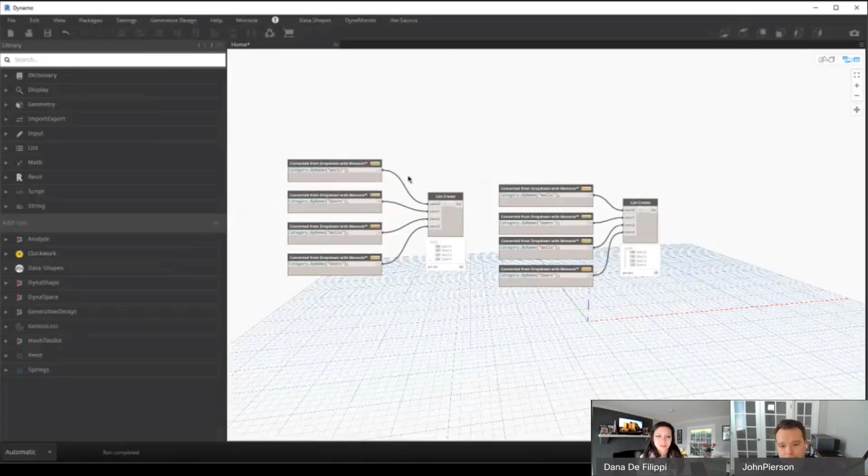So we've seen an adoption of Dynamo blow up over the years, and along with more Dynamo, we've seen more bad Dynamo happen, right? So helping people do better Dynamo was high on my priority list when I started going to AU and seeing more classes for Dynamo and things like that, and hearing that it's not just you that are super frustrated with some of these things.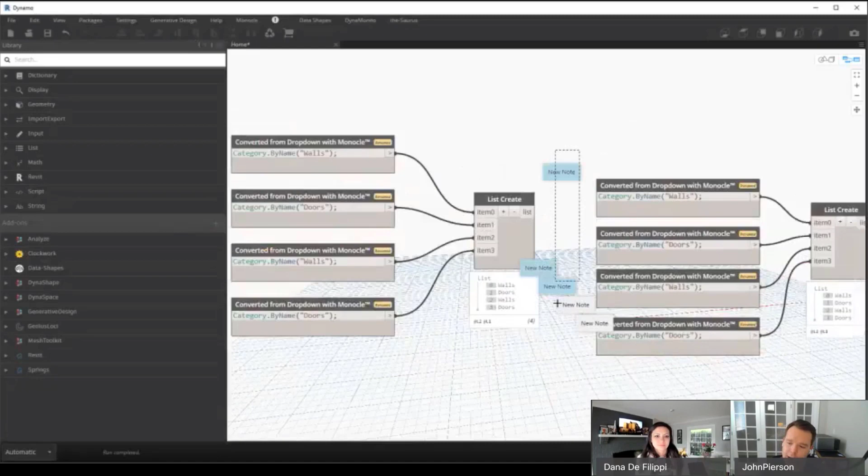For sure. So people are always having good ideas about like, oh, we need Dynamo to do blank. Right now I have a request for notes, because my tool won't align notes right now with other nodes or groups, so I have to add that. That's something that someone noticed. They're like, oh, I like to use notes and I want them aligned. So we can do that too, within reason, as long as it's doable within the host tool.

But up until Revit 22, for instance, we used to always have people saying like, I want to create ceilings with the API, and it's like, we can't just do that, it's not doable. It's another thing you start to learn, like what's possible and what's impossible, especially as a Dynamo user. Everyone hears the 'can Dynamo do blank' from someone. And if you hear that, you're in a good spot because people trust you. But sometimes you're in a bad spot because you have to tell them no. So it's kind of an interesting place to be.

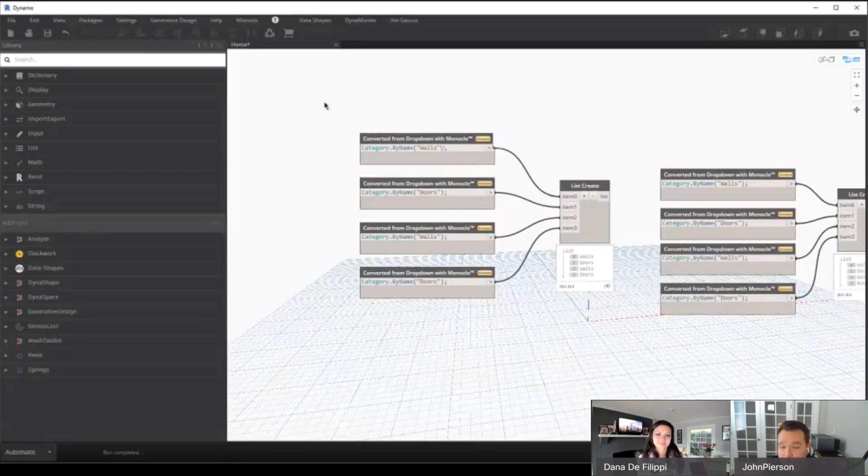I'll just show a couple more things. Sticky notes, these ones are fun. So if I wanted to save this kind of on the fly between Dynamo graphs, I can. So I'll just leave that floating, this little sticky note on the side, and start a new graph.

That persists between graphs, not Revit sessions. That's cool. Had someone get really ticked off because they had a whole Python script pasted in it, and they closed Revit and Dynamo, and then it wasn't there. I'm like, oh yeah, it's a post-it note, it's temporary, it's not a whiteboard with permanent marker on it.

So that was one of the first tools too, also born out of frustration of I can't copy between two Dynamo graphs, or at least you didn't used to be able to. Now you kind of can. It works most of the time.

And then you can kind of stack them too. This one's funny because it actually uses some logic to make them rotate differently as you stack them, so it's kind of interesting. That's one of those things I got curious about, rotating something in C# or in code, and just kind of got sidetracked.

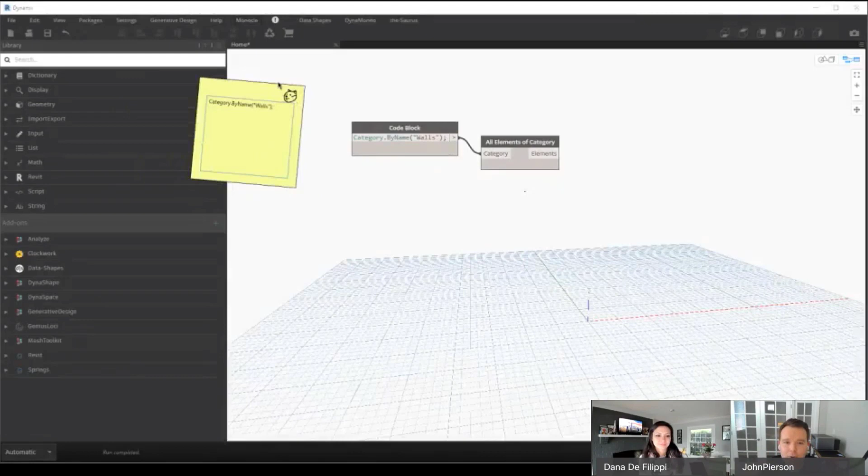And then if you right click on the X, you get like a little bonus. So Easter eggs everywhere.

We'll copy a few nodes real quick to show something else. Shopping cart it. Cool, so we're collecting a bunch of stuff.

Another thing we've started to notice is everyone's probably received a Dynamo graph that whoever made it is very proud of, and that's great, but it has 500 nodes in it. That's sometimes a good thing depending on the graph—if you have a whole bunch of category by name nodes, that's okay. But it starts to get a little hard to digest when you get a graph like that. So I started playing around with figuring out if it's pretty complex or not. This uses just kind of a little metric to score it, and I think in this case regular nodes are worth 1 point.

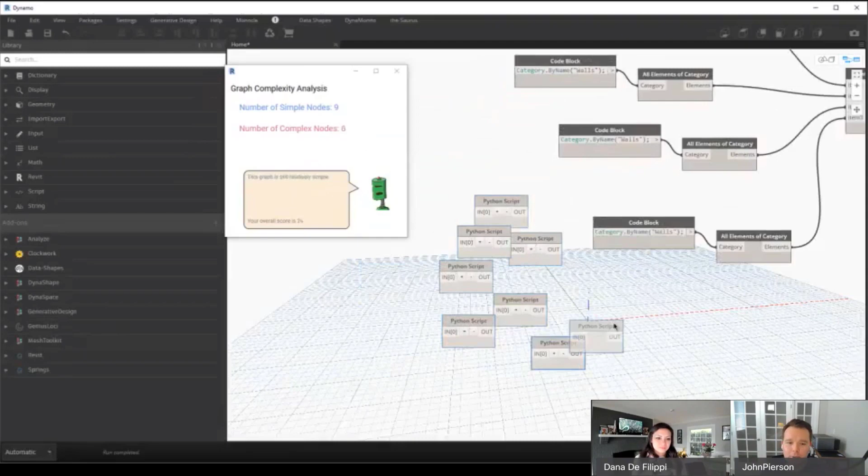And if I were to place a Python node, I think it gives it a few more points. I think that's a 5 pointer as well. So if you start adding more Python nodes, it'll start to tell you that your graph's a little more complex, and we'll fire it back up.

This one's a pretty new tool. This little robot will actually turn red when it's really bad. So if you add a few Python nodes or code blocks, it kind of weights code blocks a little heavier too. Because if I'm a new user and I open this with a bunch of Python, I get a little bit scared. So yeah, it turns red when it's a high score.

Ooh, so it's like golf, right? Lower is better, right? That's how that works. Yep, you're trying to get closer to par, not get a high score.

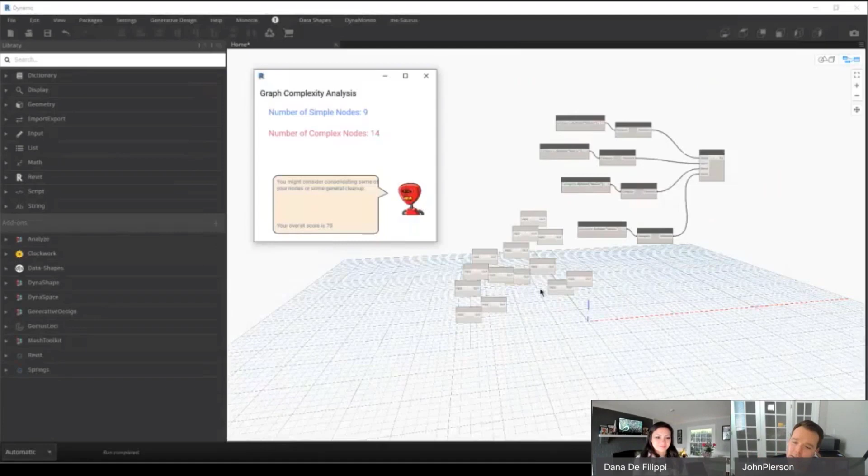Yeah, exactly. So that one's new, and I just pushed it to the package manager. It's not perfect—it was more of me messing around just to see how it is to weight these things. And these robots I learned about from Speckle.

I'll have to send you the link to share because I don't remember what it is right now. But they're unique per your IP address, so it's kind of funny because it's like a web thing—unique for every person that opens it up. So it's kind of generative, right? Which is pretty cool. You can have your own custom robot that's assigned to you, which is kind of neat.

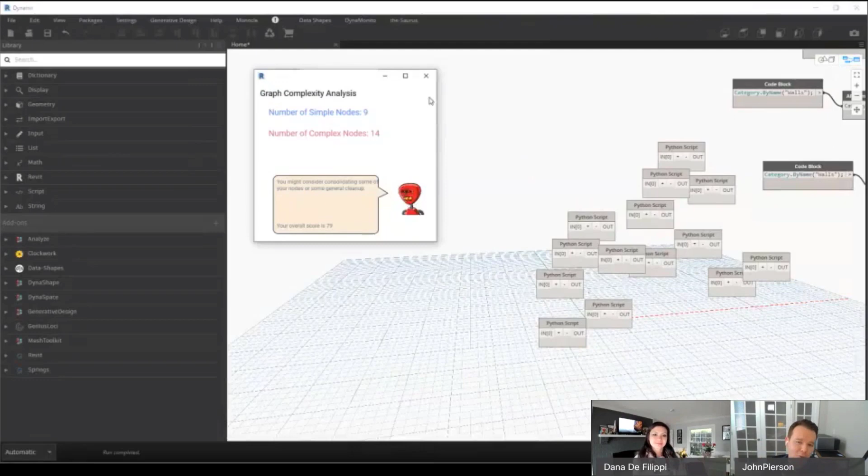Yeah, and I'll delete all these Python scripts because they're going to give me anxiety—there's a lot of them. Other than that, Monocle's one that I still build, it's Rhythm. There's new nodes for 2022 in there actually, for Revit 22.

So some of the new interfaces and API, or what are some of the new things you're doing? So you can create ceilings now in the API in Revit 22.

I actually don't even have Rhythm installed, so that's kind of hilarious. I'm recording some videos that have the specific packages loaded. So I uninstalled everything right before we got on this meeting, and I didn't reinstall that.

But yeah, it has ceiling creation, floor creation with multi loops, and then the viewport labels—you can move them around. It's kind of nice because I can probably share the GitHub link too, just to share it.

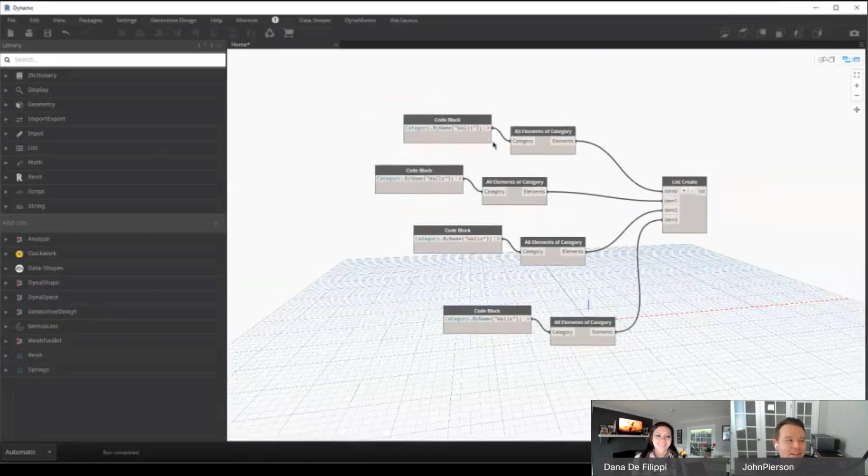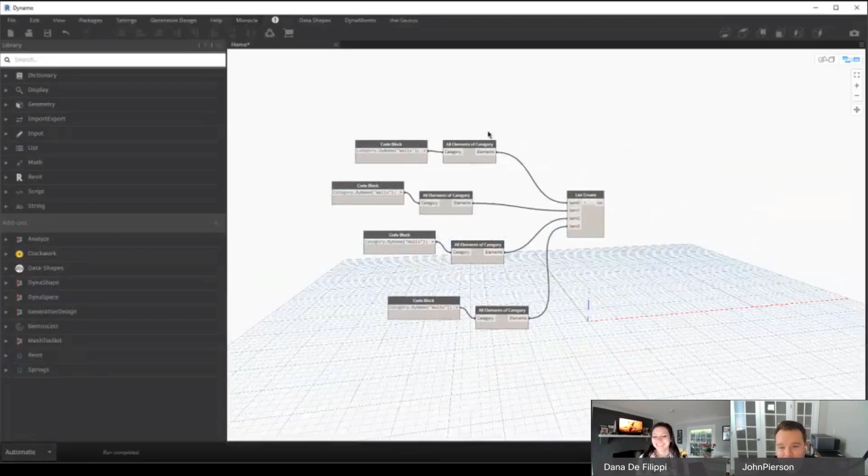And specifically with some of the stuff you're showing, people are able to align all their stuff on the fly—it's not doing all the work for them, it's just aiding them in their Dynamo journey, like being able to find that node to align or group it. Exactly, so as you're building stuff, being able to map out your logic is really important, even for the next person or for yourself.

It also doesn't hurt whenever it has some fun to it. Anyone who knows the Konami code, you enter that in Monocle and it does something cool—up, up, down, down, left, right, B, A. Yeah, so that's kind of fun. A lot of stuff like that's embedded in these things. Sometimes I forget some of the junk I put in these files.

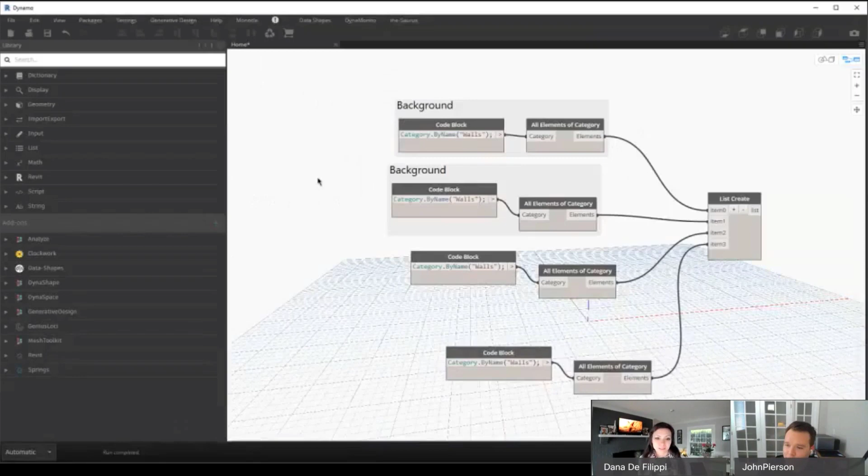Well, thank you so much for showing us. I'm so excited to go get the new versions, the shopping cart in particular, and the node-to-code advancements with Monocle are so cool. I can't wait to start using those and showing them in my videos. I'm going to reference this video in many of my future videos because I'll be using Monocle.

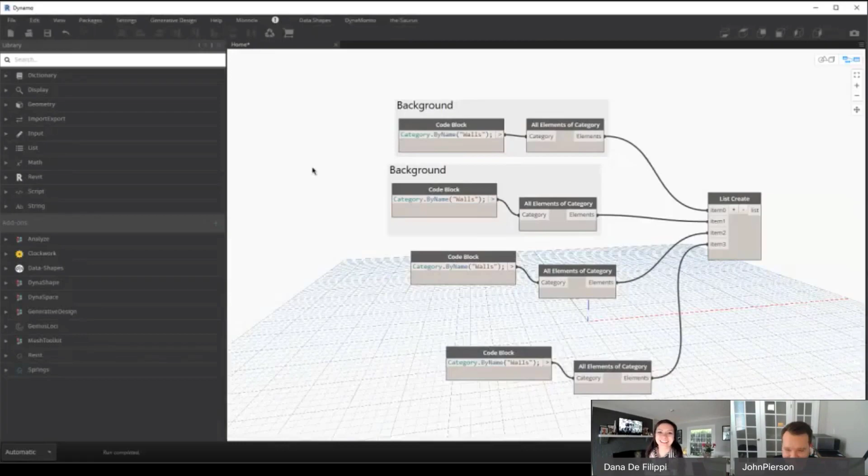But yeah, I really appreciate you inviting me to chat about some of the goofy stuff I'm up to, and just catch up too. I think we all need to catch up with each other more, and hopefully we all get back to talking smack about Dynamo in person at events—just kidding. That way they can hear you, so you don't feel bad talking about them when they're in the room. Well, thanks so much, John. Have a great day. Yeah, thank you.